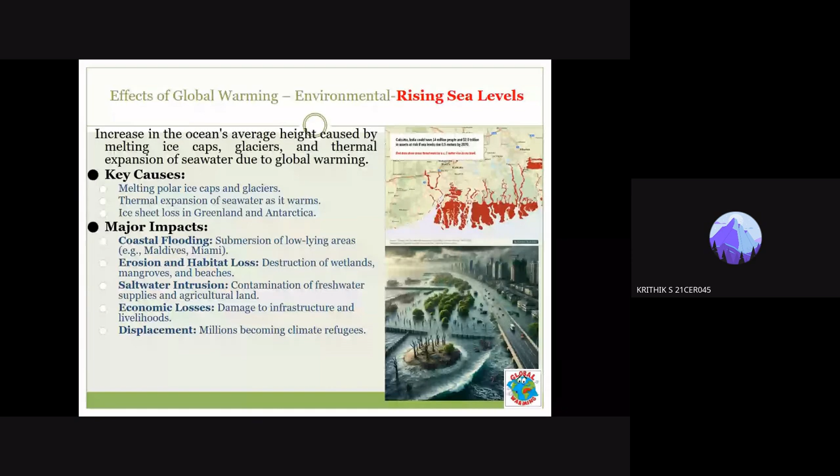So how are we controlling the saltwater intrusion? If we are controlling the global warming, if we are controlling the flooding, or we can control the erosion, side by side we can also control the saltwater intrusions. So there will be also economic losses because we are preparing the scheduling initially using Primavera or many other softwares, MS Office or MS Project or Primavera, to plan and schedule and maintain the activity. And we are also giving the budget abstract estimate, detailed estimate for doing the activity, how much amount we need to spend for constructing the building or producing one element. So if we are not controlling the basic global warming, ultimately the economic losses will be there which we already spent, and finally the displacement.

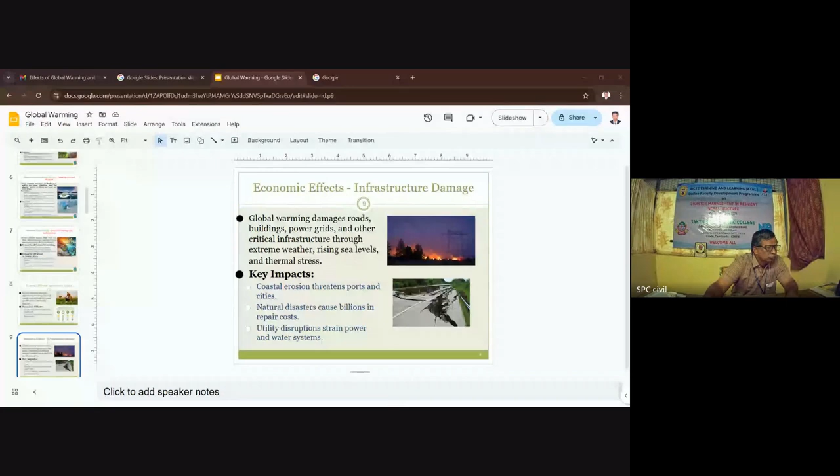So is my screen visible, sir? No, sir. It's not visible, sir? Yes, sir. Not visible, sir. Okay, just a minute. Now it is visible, sir. Is my screen visible, sir? Yes, sir. Now it is visible, sir. What is that heading you are seeing, sir? Which is the slide? Sir, heading key impacts. Key impacts, economical effects, infrastructure damage. Okay. Yes, sir. Okay, sir.

So this is the economical damage which is creating for the infrastructure, because of the vibration or earthquake which is happening to the bridges, or flooding which is happening.

As I already pointed, there is a thermal expansion or thermal behavior, thermal interaction between the environment and the surface we are studying or living on. I will tell you one example: there is fresh concrete we have laid, and it is open to the atmosphere. In some cases, there is a possibility of self-desiccation. Self-desiccation means evaporation of water on its own from the top surface.

So the evaporation happens if the top layer is subjected to more temperature - the water or moisture present in the surface of the concrete gets evaporated because of the excess temperature. And if the water is getting evaporated, that water will not be enough for the hydration. So there will be a formation of shrinkage, leading to cracks and disruptions in the structural element due to cracking and debonding. This is mainly the infrastructure damage exclusively created due to global warming.

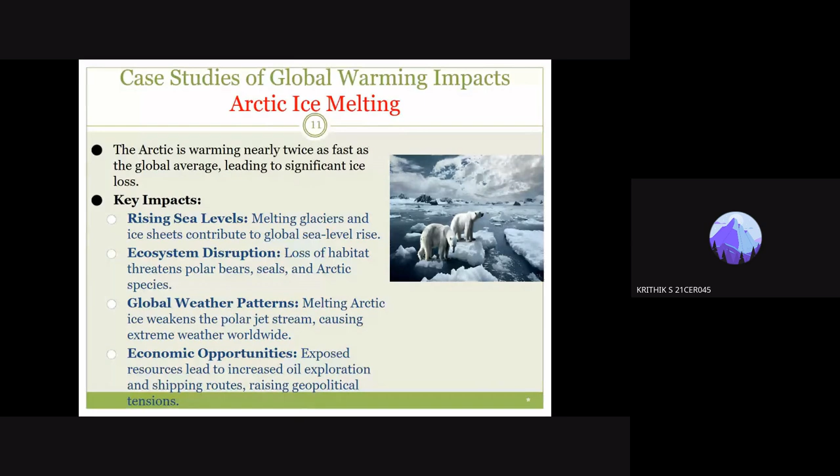The Arctic ice is melting, warming nearly twice as fast as the global average. So while there's a global average scenario for every place, in the Arctic the warming happens at twice the global average, leading to major ice losses. The key impacts of this include increasing sea levels, ecosystem disruption, changes in global weather patterns, and economic opportunities.

Coral reef destruction is another issue, with declining coral reefs mainly due to the impact of global warming, increasing ocean temperature, and acidification, which creates widespread losses. The key impacts here are coral bleaching, biodiversity losses, and economic consequences.

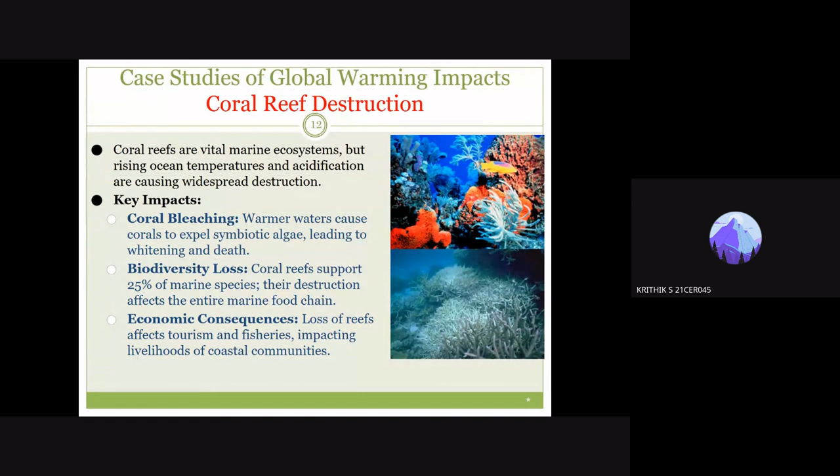A case study observed in European conditions shows that heat waves are becoming much more rapid and frequent, affecting human health, which in turn affects infrastructure like buildings and bridges, and economic conditions, which get disrupted.

The key impacts include health risks like heat stroke and dehydration. Dehydration is being faced nowadays in India too - even though we consume a lot of water, the day-to-day temperature differences create a dehydration effect. Wildfires, as pointed out earlier, destroy homes and forests. Economic losses reduce worker productivity, and there's increased energy demand for cooling, with many places using air conditioners to get relief from the heat.

There was a case study showing how many people died and how many casualties occurred - a very pathetic scenario. We may call this a natural disaster, but truly speaking, it is not natural; these disasters are happening due to man-made causes.

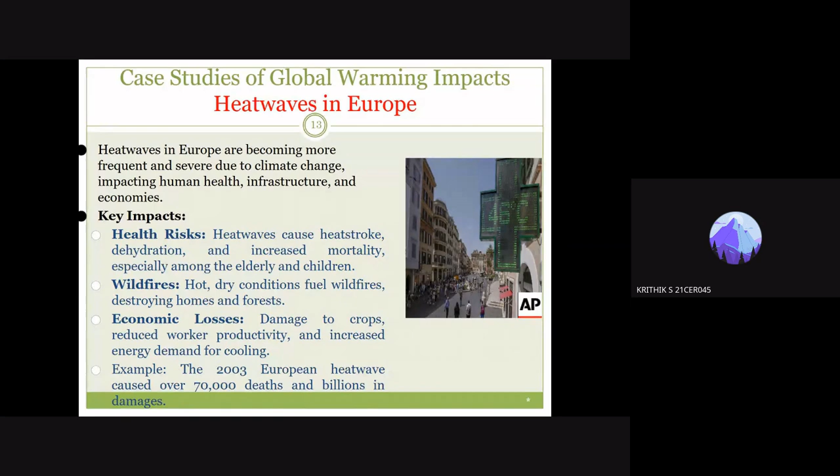This is water scarcity in Africa. NASA had pointed out earlier, in 2017 or 2019, that by 2025 India will face water scarcity. We are already facing this nowadays, and within 5 to 10 years we will face similar conditions as in Europe and Africa, because of various changes in temperature.

You can see in the photo how people are standing to get water, and how there is no proper agricultural area - almost all the places are dried, creating the impacts of drought. In South Africa, the situation is very pathetic in getting food at all times, causing food insecurity and health challenges. In Europe and Africa, people are more affected in terms of age and weight because proper food is not available, and finally people are migrating from one place to another.

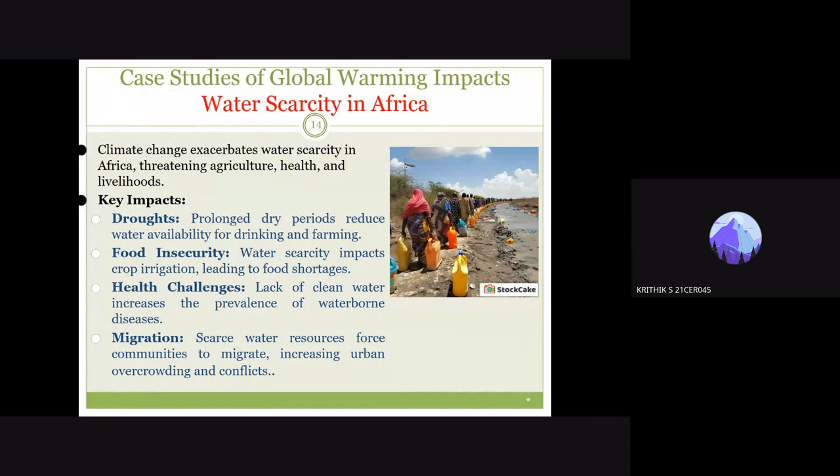Greenhouse gas emission reduction is critical to mitigating global warming and limiting temperature rise to 1.5 degrees Celsius above pre-industrial levels.

So if you want to submit a research proposal to the government of India, like DST or any other agency, people are much focusing on reduction of greenhouse gases, exclusively the carbon dioxide emission. So many places in startup mania, as well as the many SDG goals, there are 17 SDG goals, and one of them is making the infrastructure very green city.

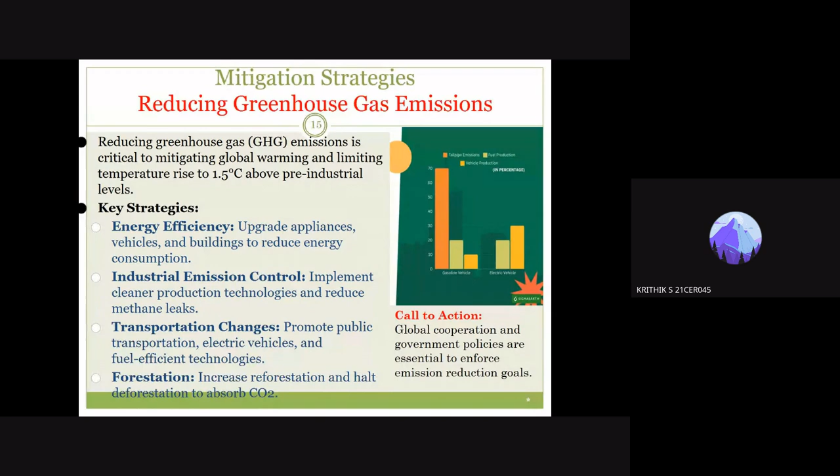And afforestation - we can plant more trees to absorb the carbon dioxide. On the NHs and all, intermediately they have planted more trees in order to absorb the CO2 from the vehicles. So there should be a proper enforcement needed. Government, both state and central, is frequently insisting to control the emission - you should not emit much beyond that. So enforcement should be there, it should come into the agenda.

So transition to renewable energy - renewable energy means generating the energy inside itself, like solar power. Nowadays we are using solar panels in the roofing, consuming energy, converting into alternate sources. We are using the same for burning the lights and for other activities also. So somewhat we should not use artificial energy.

Take for example, piezoelectric transducer. Nowadays in foreign countries, they are embedding it in the pavement itself, where the piezoelectric transducer will convert the mechanical energy into electrical energy. In the pathways, in villas or apartments on the ground floor, where there is more production of energy, they are storing it and using it for burning lamps or some other things.

So in the national and state policies and many other things, government has come up with many advantages, asking the public to use renewable energy adoptions rather than artificial energies. One other example is the generation of electricity from the dam, which we are frequently using.

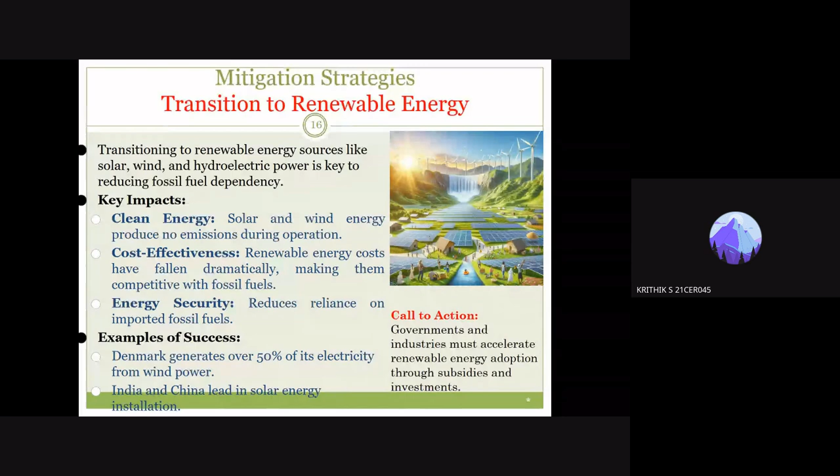In addition, we are also concentrating much more on using alternative materials to cement, like geopolymer concrete. We are using a much quantity of fly ash, and other than fly ash, we are also using sugarcane bagasse ash, since in our locality there are so many sugarcane industries. This is very, very important - please note it down.

Just a minute, sir. Yes, sir. Yes, sir.

I request the professors, irrespective of any department, to note that carbon emission is happening directly—they are dumping into the land. In addition, as an alternative, you can search for the capture methods.

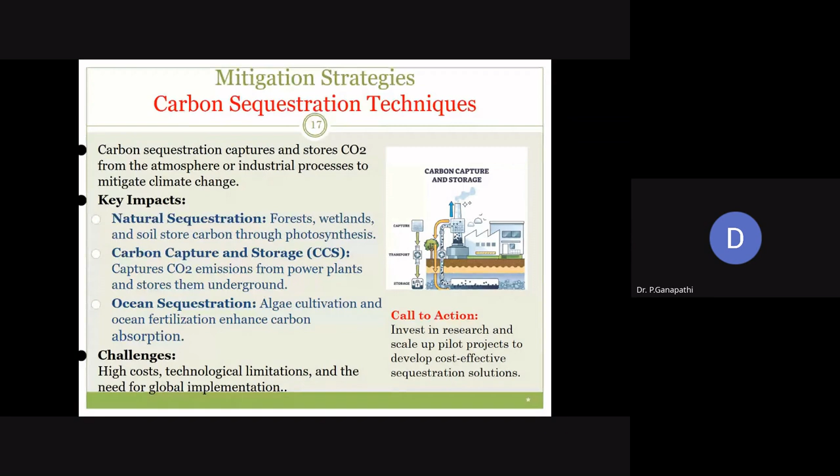Am I audible, sir? Yes, sir, okay, yes.

You can go for the capturing technique—how the transportation will work, how we can have the captured CO2 and how you can store it. Nowadays there is a lot of research available; CO2 is being passed into fresh concrete, and they are studying the mechanism. So we can go for natural sequestration, or carbon capture and storage technique, called CCS, and ocean sequestration.

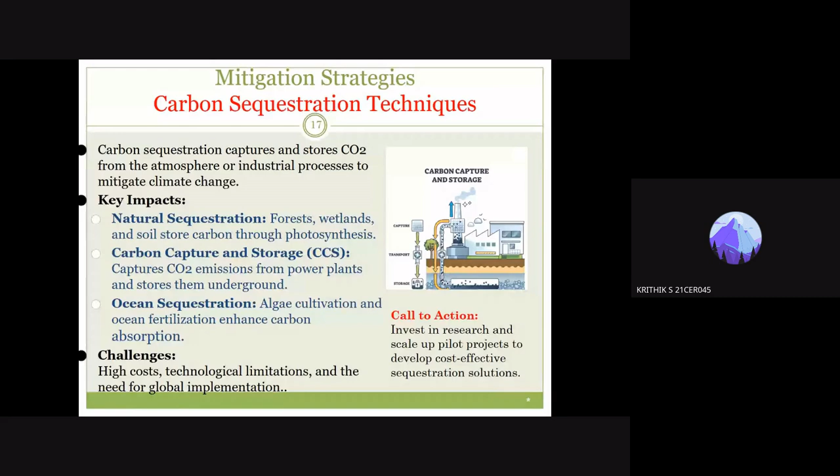This is very important for getting proposals in carbon sequestration techniques. We should shift to low carbon economies by using battery vehicles, like trams. In the US and other places, electrical trams run all over. There is also a new technology nowadays called Hyperloop technology, which you can look up online.

In addition, Hyperloop technology is a very advanced technology where you can migrate from one place to another in the shortest span of time. Minimum speed is around 800 km/h, like flight speed. It's like a capsule where a bullet train runs inside; you can enter the bullet train and shift from one place to another at a very faster rate—minimum 800 km/h.

Nowadays, IIT Madras and America have tied up and are designing Hyperloop technology, in addition to other countries. There are also flying taxis available in Arabia and Gulf countries. So by reducing ground-based transport modes, you can help reduce global warming. The international cooperation treaty, the Paris Agreement, has been signed in order to strengthen commitments and enhance global collaborations.

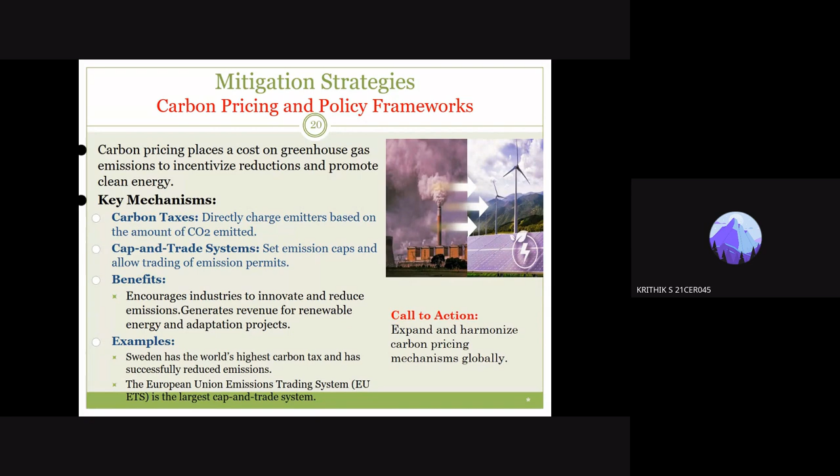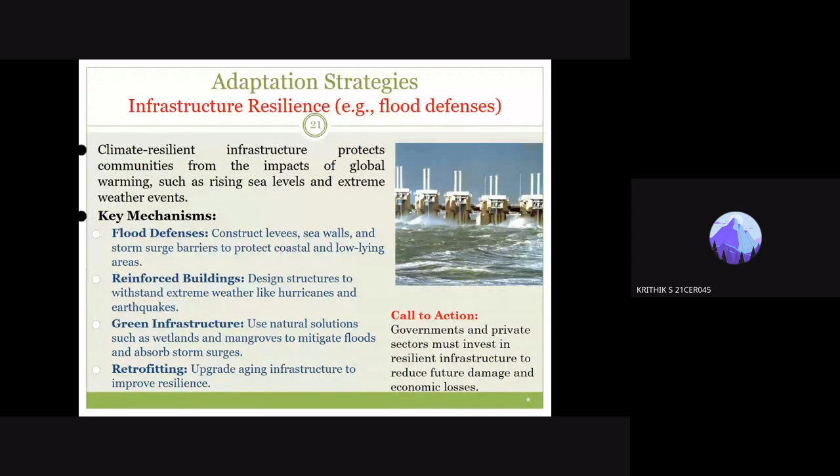So if you are designing geopolymer concrete, our main focus should be on environmental conditions. The molarity should not be fixed but should change with respect to the environmental condition. The key mechanisms to focus on include reinforcement—whether we are using reinforced buildings, green infrastructure, or repair and rehabilitation, etc.

There is a correlation between climate-smart agriculture. Earlier, there were ponds where we stored water for agriculture. After that, we started using drip irrigation. Nowadays, in the modern scenario, we use sensors to observe the humidity level in the soil, and based on that, water spraying happens.

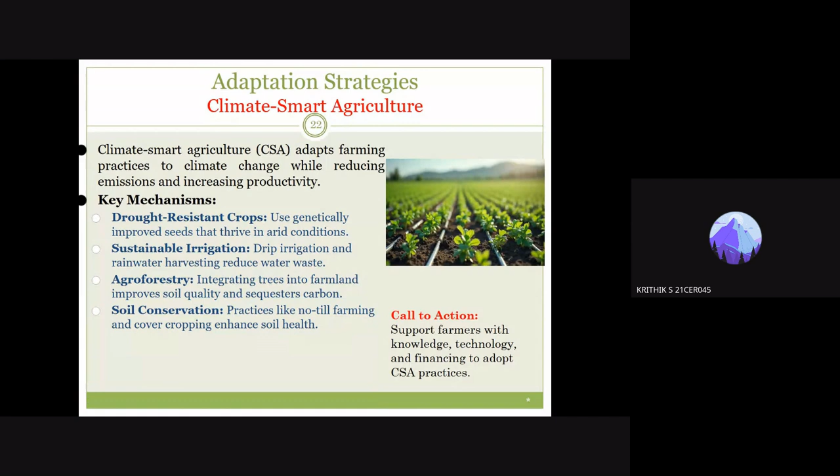In the current scenario, drones are used to spray water over agricultural land, continuously spraying across the area to improve agricultural fertility, in order to achieve sustainable irrigation and soil conservation, etc.

So early warning systems, which I have told you in the previous session, AI tools, early warning systems are giving indication to the agricultural people based on the weather. This will save lives and reduce economic costs mainly from adverse environmental conditions, using community alerts via SMS, radio, or other tools for giving indications, preparedness plans, and weather monitoring.

So these are very important key mechanisms for disaster preparedness. Nowadays people are using IoT. We are working on a project with the computer science department and IT, on how to give alerts to the agricultural field using an IoT based method, such that we get prior information saying your agricultural land is getting dry, there is a need of water for increasing humidity. So in order to improve response and recovery, there is a need for early warning systems.

Community based NGOs should participate, and community outreach should be there. Governments are giving more policies to generate NGOs and international bodies by giving funding, to participate in appropriate knowledge sharing activities. Urban people should come to the rural areas. They need to teach the rural people what crises are happening and how we can improve fertility in order to avoid global warming. Proper education and training should be there.

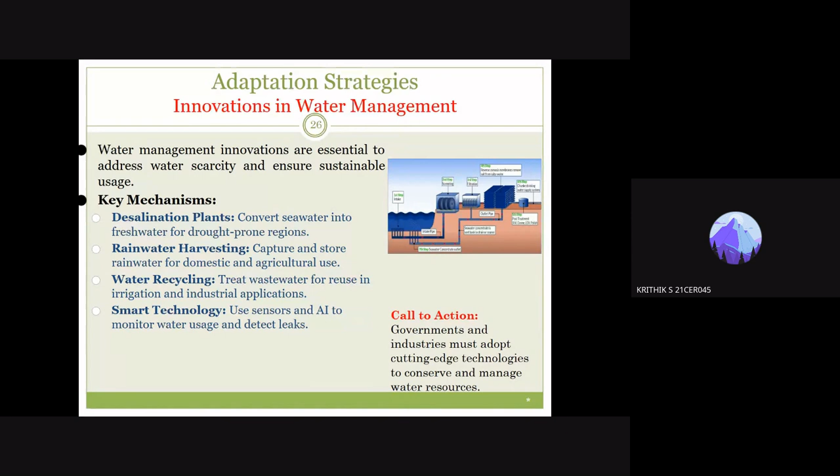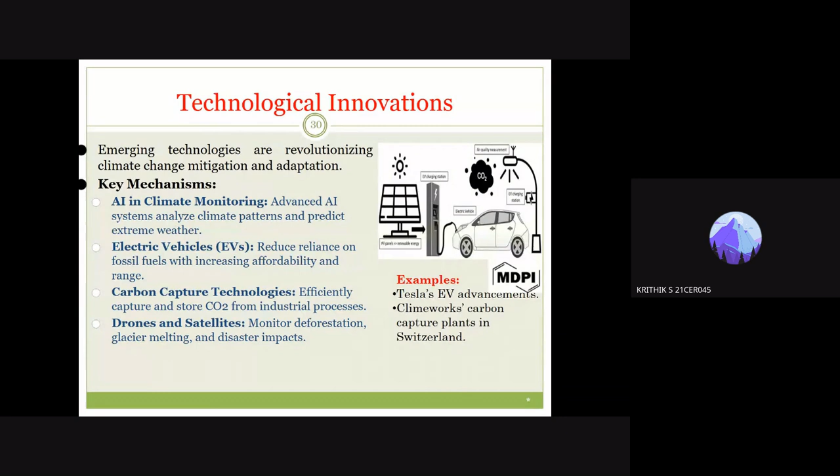So, call to action: World Environment Day is being planned everywhere, and also in college we are organizing many activities, assigning tasks to students on how we can protect ecosystems by conducting more campaigns and initiatives for the public. Ultimately, we need to know about the 3 R's: reduce waste, reuse materials, and recycle. In China, Taiwan and elsewhere, they are doing much more activity in recycling technology.

So finally, I am ending with this quote: be the change you wish to see in the world. Thank you so much.

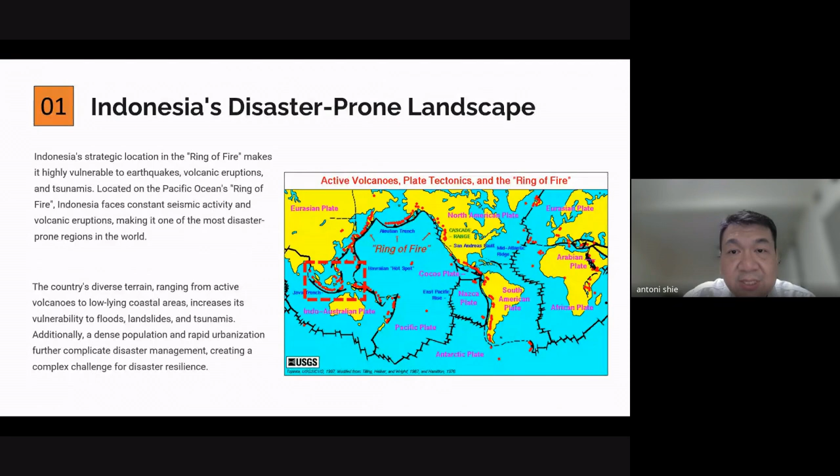In this condition, Indonesia has many earthquakes each year. We can see big and small earthquakes mainly occurring in the southern area of Indonesia. This is a country made up of islands—there are 5 big islands: Sumatra, Java, Kalimantan, Sulawesi, and Papua. These are our main islands.

There is movement of the tectonic plates as shown here. We get movement of about 5 to 6 centimeters in this area, 7 centimeters. This movement causes collision of the tectonic plates, resulting in significant earthquakes in this area, and also in the Sulawesi area.

Most of Indonesia is disaster prone, and we can see here the least occurrence of disaster is in Kalimantan. This is in the center, which is why Singapore, Malaysia, and the Kalimantan part of Indonesia have quite low risk of earthquake occurrence.

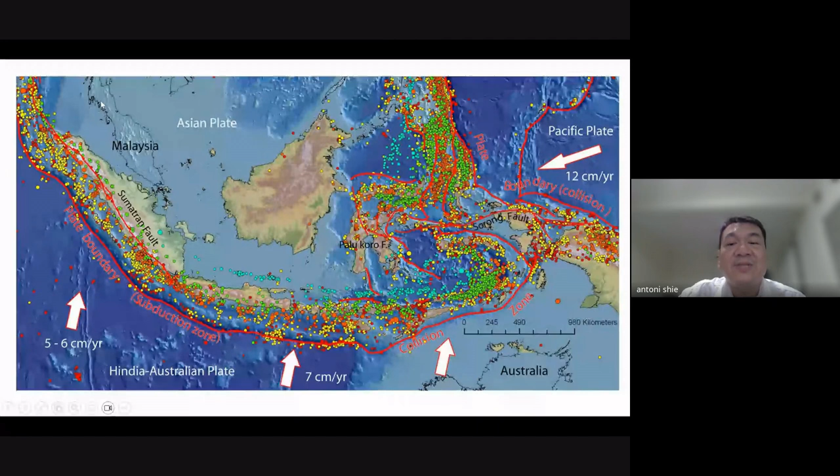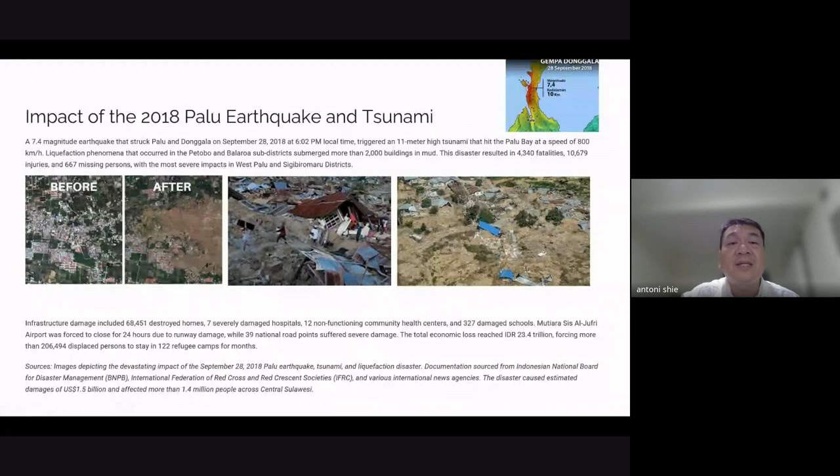We can see the data shows many earthquakes have already happened in Indonesia. When we survey the damaged areas, we see there is a significant lack of controls in the building codes and construction. This is mainly the picture I got in Yogyakarta, even in the center of Java, the most populated area, where there are many educational institutes. We can see the very lack of design. Here are the details of the building - this building is quite new, about 2007, and got destroyed during the earthquake. We can see here the lack of stirrups. So this was mainly the design, and the details of the building were not on par with the current code. The design code was already implemented, but many buildings were not following the code.

And then we can see here, this is also a damaged building, and even some part of the area, we can see this is like a wall for the building, and it's lacking the structural elements. So there's no column, no stirrup, and no flexural rebar in the column.

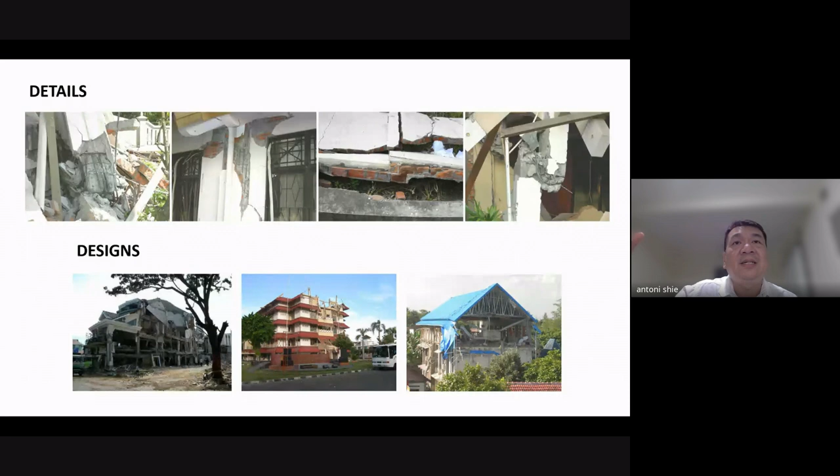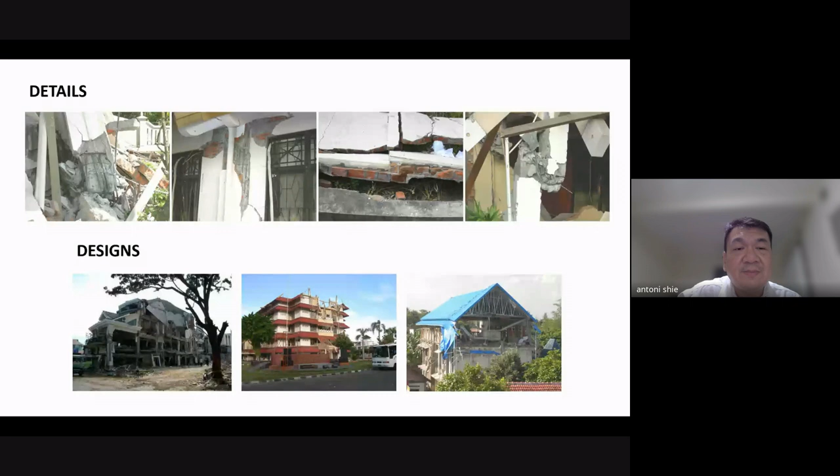And this is another building, a hotel I think. So there's a process of construction in stages. That's also a big concern, because when people are building their home, or building some kind of commercial building, sometimes when the capacity is not enough, they increase the level and add a new section, and the connection of the building is not properly controlled. So what we've shown here, I think this is still common.

So I talked with my colleagues already, and he said that the problem is still the same, even in the 90s, in the 2000s, and even up to now, many problems are due to the connection detailing.

So when there's a building, we can design it to be earthquake resistant. The design is good, but during the construction period, there's a lack of control in the detailing. I think the most significant detail we've shown here is that the stirrup should be bent 135 degrees.

So 135 degrees, so that when the concrete is cast, the stirrup stays inside. But most construction just uses 90 degrees, so when there's a big movement of the column, the stirrup can open easily.

So this is a very common process of construction. Even though many details are already shown, sometimes lack of control and lack of awareness of the details causes the damage.

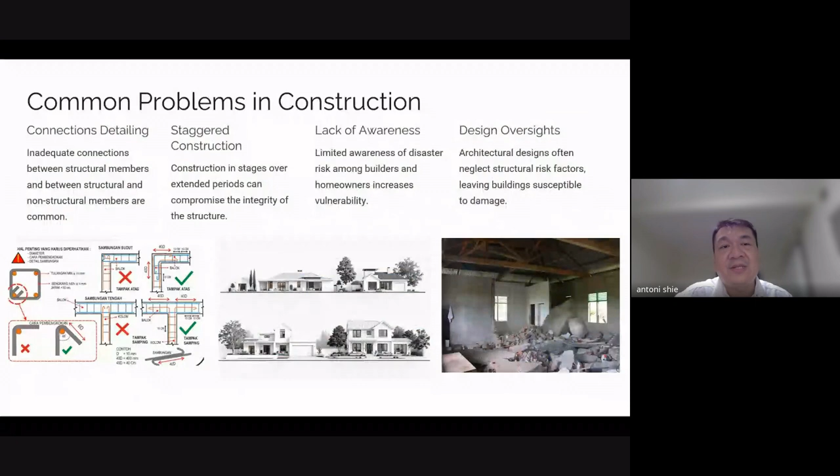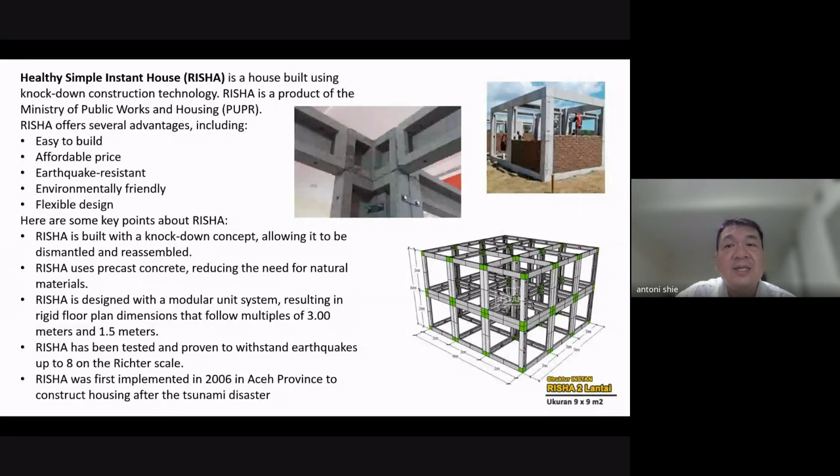However, the application of this kind of building is not much. Mainly it's government subsidized and implemented during disasters. So after Aceh and after Palu, they sent this to the region and used it for housing for the people. Due to the lack of construction guides, many academicians also helped the people to make a guide.

So there are many construction guidance. This one is Teddy Boen, who I think is also famous in Indonesia. He proposed a very simple construction method, even the wall using mesh and then plaster, like a mesh wall. So the design is very good, but of course design and implementation is a bit different, because when we add cost, some people just don't want to spend that cost for increasing the details.

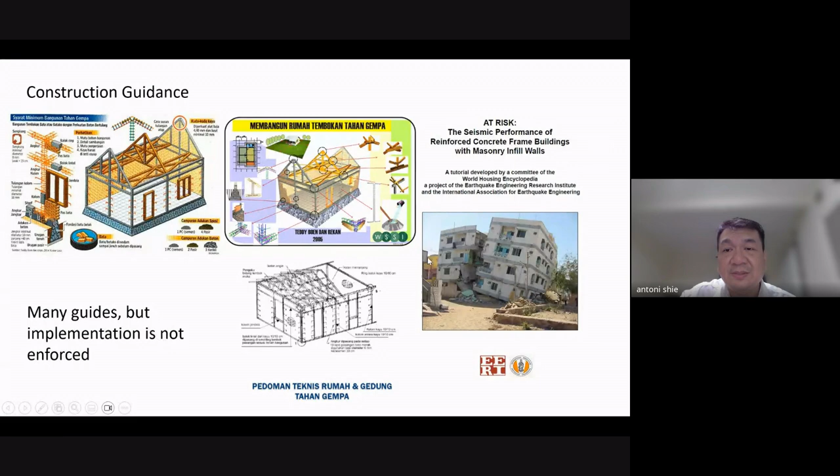So there's many guidance, but the implementation is not enforced. This is still one thing that happens. For the summary of the condition, disaster risk and awareness is a major challenge, because complacency, widespread code violation, and limited public understanding leads to many structural deficiencies. This is also a problem that we are facing, and it's still going on. That is the condition of disaster in Indonesia.

So I want to continue to the next topic. I think this is also very interesting to show that the earthquake is cyclic. People in Aceh and Nias already know that there is an earthquake happening every 20 to 30 years, a significant earthquake will happen. That's why the people are already building housing that can withstand the disaster that happens. So these are examples of traditional housing in Indonesia.

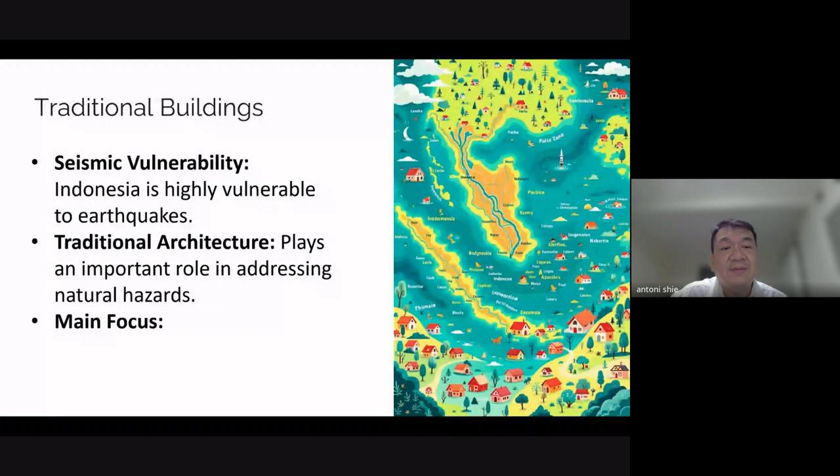In Indonesia there is of course seismic occurrence. People already know this, and the architecture is also adapting to the challenge of the region. We can see that traditional buildings often combine natural materials, bamboo and wood, that are flexible and earthquake resistant. The construction technique is also designed to absorb earthquake energy and reduce impact.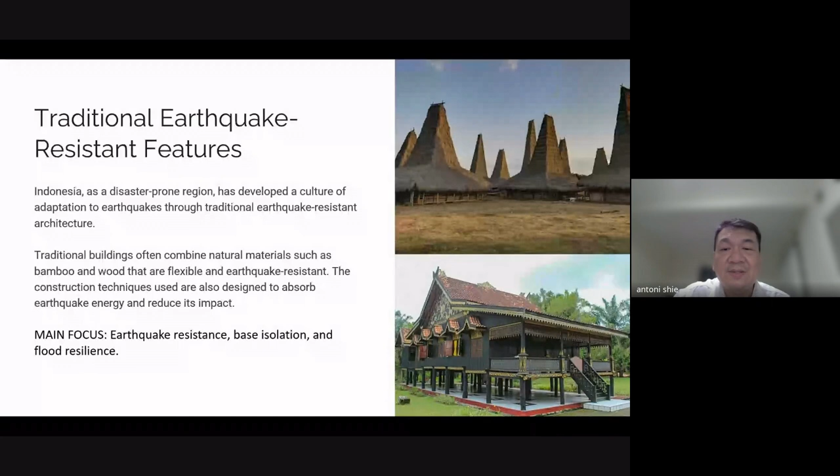So the main focus - currently we already know what is good design for earthquake resistant buildings. But previously they just based it on experience, the experience of the surviving buildings. So when they see a building can survive, their neighbors, when rebuilding their building, of course used the same kind of design.

The earthquake prone region also uses lightweight structure. That's why lightweight material also reduces the damage to the building, because when there's a very big earthquake, the building has less force in its structural members. And also the main part is that we realize or unrealize the building stands on some kind of support, like a base isolation model.

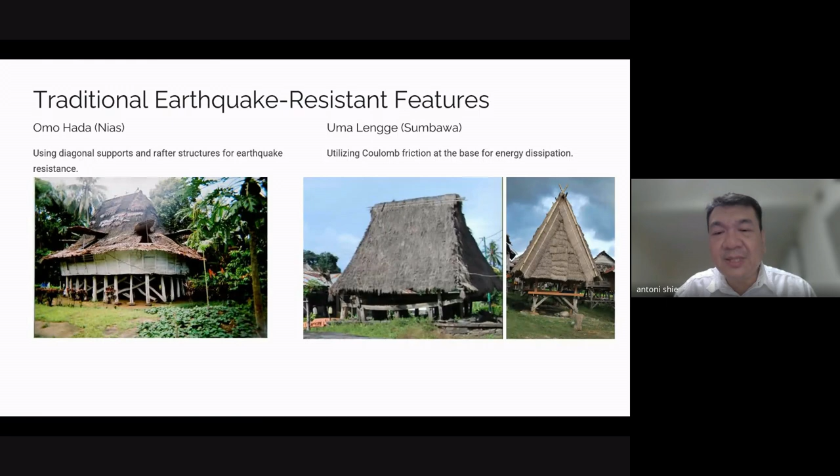So the footing is like this one. They all designed the footing of the house using wood, and it was placed on stone, so the wood will not rot when there's a connection to the ground. But this kind of connection can be considered as Coulomb friction for energy dissipation. This is the condition of the building. For the Omo Hada, there's many diagonals, so the stiffness of the building is quite high.

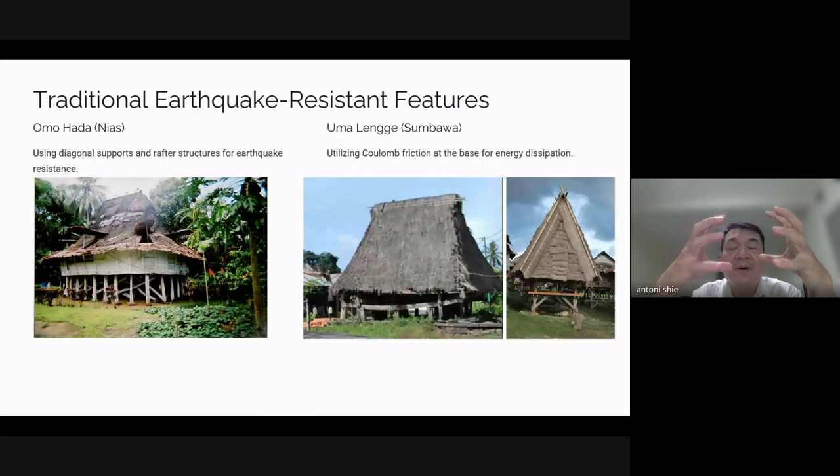We can see here that mainly due to experience, when there's an earthquake, the building will behave like a solid block on a moving platform. I think that is the design, and this is a traditional design, and even modern buildings already understand this kind of design.

And then at the bottom, this is similar to a base isolation model, but for modeling we use Coulomb friction. So we can get technical insight from traditional design.

Modeling traditional structures is quite difficult, so the joints are normally assumed as fixed. However, the real connection of wood is normally using struts, so there's some kind of movement, not really fixed. And the model of the connection friction can also be varied.

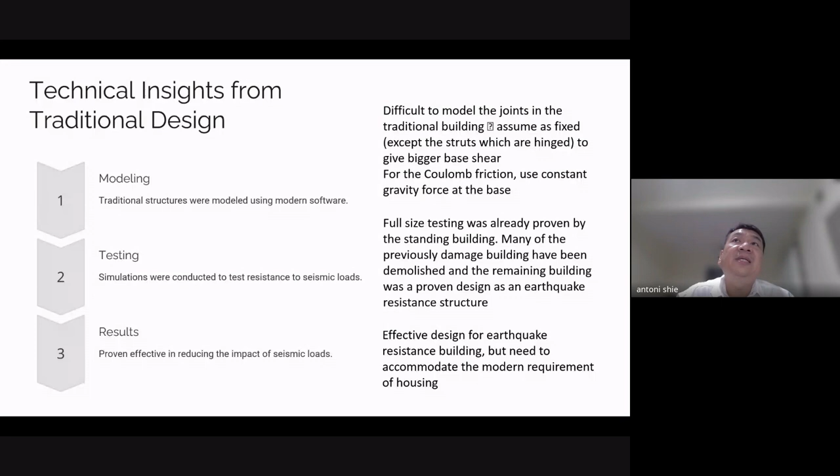So the testing normally cannot be done on our design, but this is a traditional building. They're already tested one by one, so the full scale model already tested, and the design that is surviving is already proven by the standing building. Previously damaged buildings already been demolished and also already been modeled to show that the latest design should be the best one, an effective design, but this design needs to be modeled for the modern building too. So this is the result.

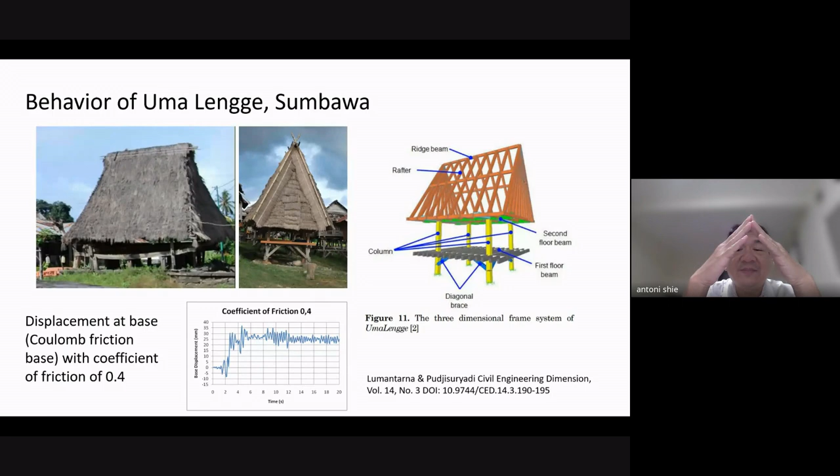So when the building moves, what actually happens is the energy of the earthquake is not transferred or absorbed by the member, but absorbed by the movement of the building instead. This reduces the energy on the structural member itself, just changing it into movement.

The friction coefficient was also varied. When the friction was too low, of course there's no dissipation of energy. But when the friction was too high, it's similar to the building being locked into the ground, and all the energy is absorbed by the structural element. So there's a balance needed.

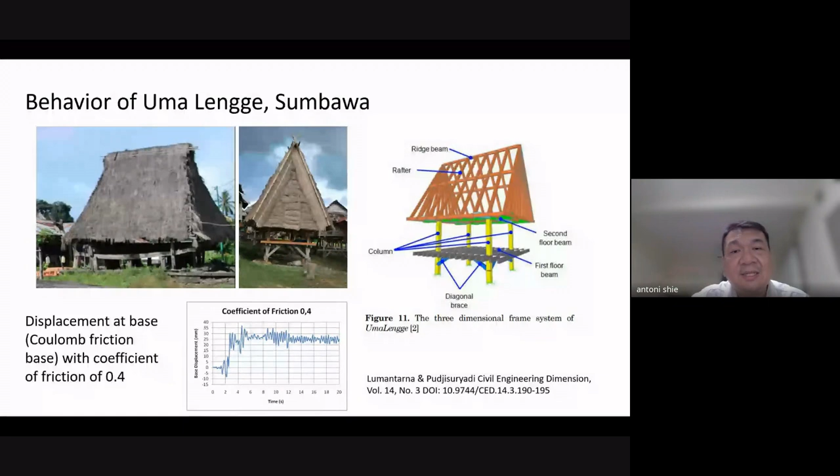We already know modern buildings use base isolation. The base isolation system causes less deformation in the building, and more energy is just changed into movement energy.

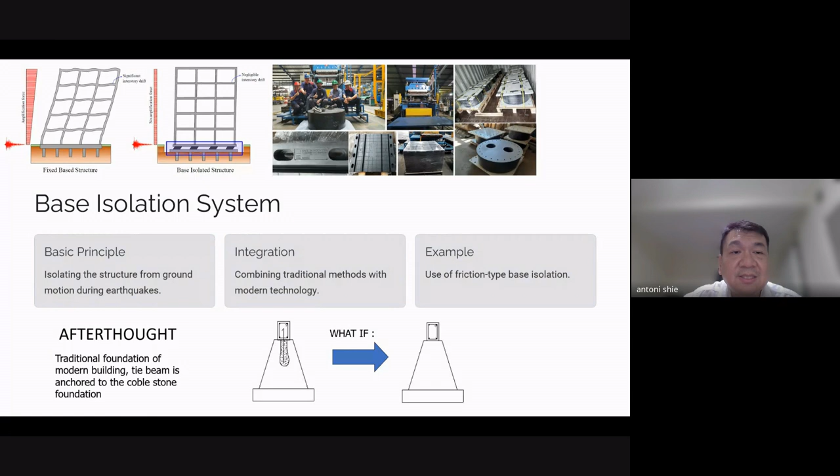There's an afterthought from my colleagues that for current buildings, we still need to think whether we should anchor the tie beam - the structure for the floor - to the foundation, or just put the building without anchoring, making it slightly wider, with a ground layer and everything. So this is a process that still needs to be considered.

Challenges in modern adaptation were also considered, and I think he made a paper after this to model a more common building with Coulomb friction modeling. Of course, when there's movement of the base area, there's a reduction of deformation in the building, and the damage should be reduced. But practical application needs to be considered, like the cultural condition of the people, and technical factors.

When the building is used, of course there's some maintenance issue that needs to be addressed, because when we allow movement of the building in the design, the maintenance should not make the design fail to happen due to lack of maintenance.

That's what I'm saying. Also in Indonesia, mostly the buildings are non-engineered. Like the guidance I showed you, most houses are just common housing with columns, walls, and roof, one or two story levels, so they were not designed to resist earthquakes. The majority of our private housing was built without engineering design.

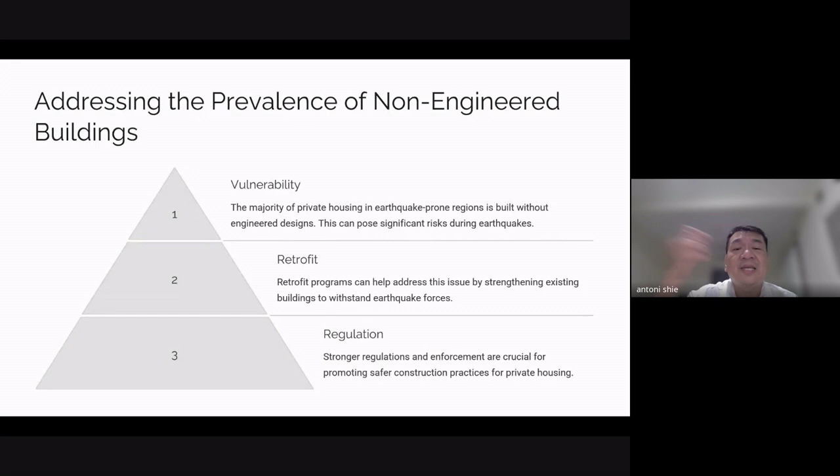So I think that concludes my talk for the third segment.

The fourth topic I want to talk about is low damage design technology for earthquake resistance. This is also a concern, because after we make a building and an earthquake happens, there's damage on the building, and then there are aftershocks. Most fatalities occur after the main earthquake shock, then there's an aftershock, and the building is not safe. When people have activity in the building during the aftershock, it's also very dangerous.

When I was visiting some post-disaster areas, there was a big earthquake in Padang around 2005-2006, and the building was damaged. Then after 3 or 4 months, there was another big earthquake, and the previously surviving building got destroyed during the second earthquake.

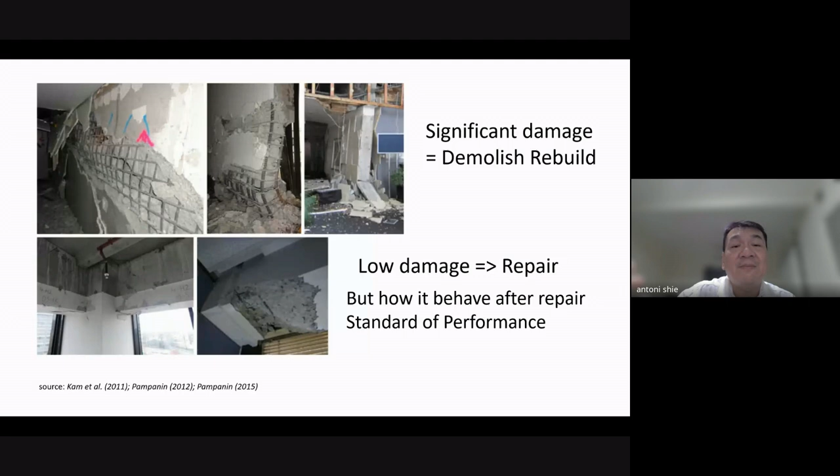For the topic shown here from Professor Pampanin, he shows a building using precast concrete where although no damage was shown, the lack of confidence in that building caused it to be demolished. Even though the design was good and the performance after the earthquake was still good, due to the lack of confidence in the soundness of the building, it also got destroyed - because the building was not designed to be able to be low damage. So I think that is also one consideration.

We already know that when designing a building, when there's a low magnitude earthquake, the building should be fully operational. When there's a higher magnitude earthquake, essential buildings still need to be fully operational. When there's a rare or very big earthquake, life safety should still be the goal.

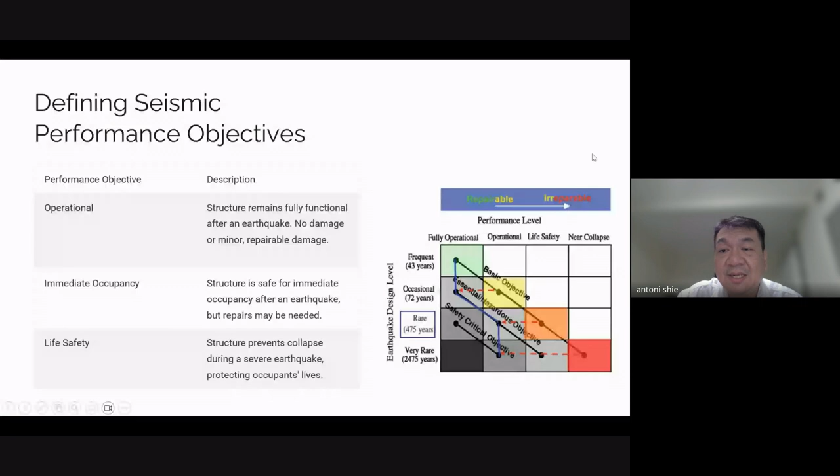Very rare collapse, near collapse should be the goal. So when is the building repairable and when is it irreparable, that is the consideration.

This shows the need for low damage design. Traditional seismic design focuses on preventing structural collapse during an earthquake, because the designer's consideration is just that we design it so that when a big earthquake happens, it will not collapse, and then after that we need to rebuild. So when designing for that kind of building, when disaster happens, the cost for rebuilding is very high.

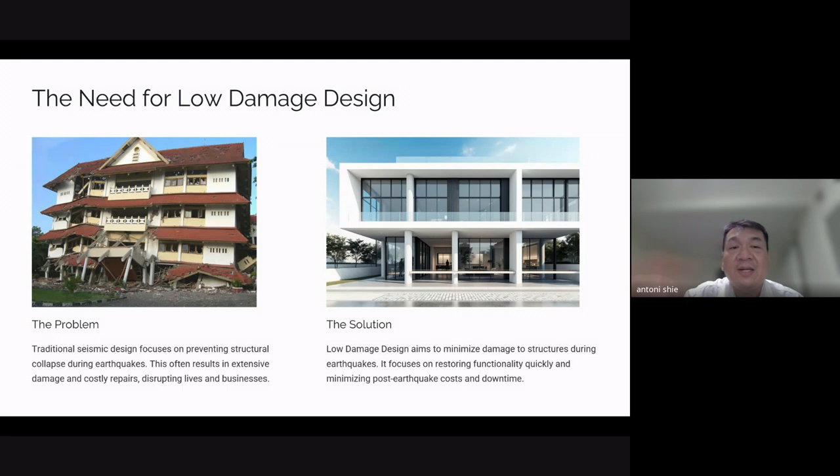So the new paradigm should aim on low damage design to minimize damage to the structure during an earthquake. I think this idea is simple: when you have many components connected by pre-stressed material, after movement it can still continue going back to the original state.

The damage control technology previously developed includes three key strategies: base isolation, dissipative braces, and others. Base isolation is separating the structure from the ground. The technology now is very advanced, we just use rubber bearings. Dissipative braces: when there's earthquake movement, there are many braces in the building that absorb the movement and reduce the stress on the structural element.

Post-tension rocking mechanism is where part of the structural element is connected using a post-tension cable, and after the earthquake it will move back to its original position, just like a toy.

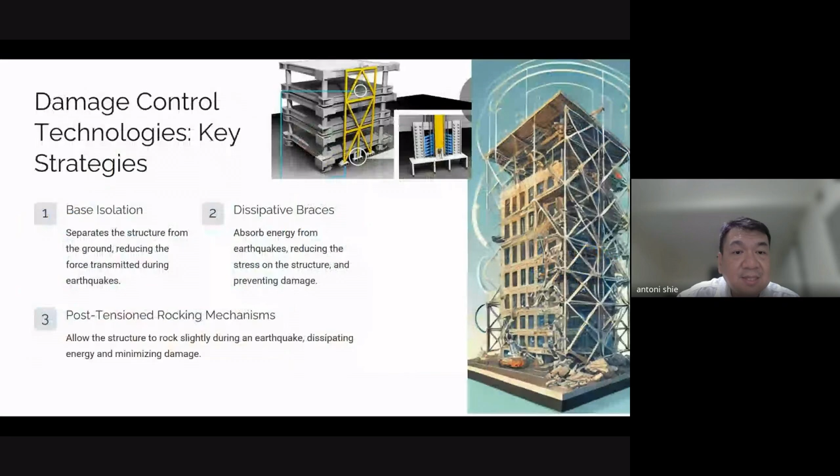This is similar to the traditional building I showed previously, but with modern design. This process is very expensive though. There's also a building for a school, built with earthquake resistance using base isolation. The design is still common and can already be applied, but the cost is still very high.

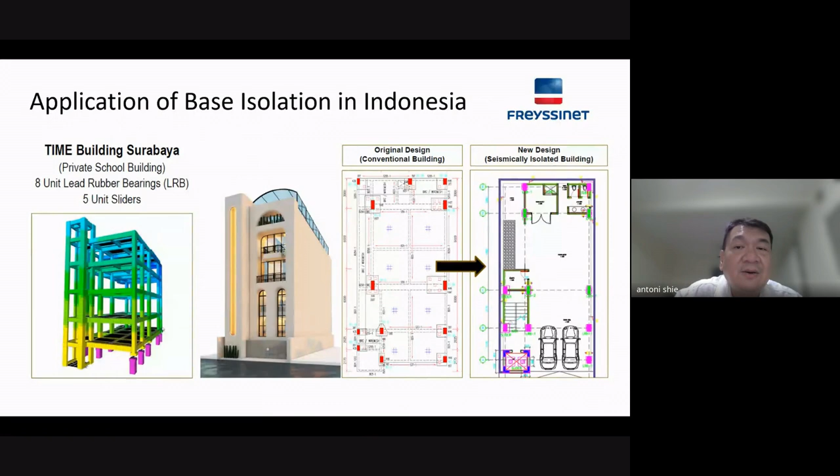Comparatively, previously we also considered that when you have a low seismic force on the building, the member should be smaller. This is also a consideration when there's base isolation - normally you'd have a smaller member size due to the lower force, but the cost still needs to be considered.

This is the model for self-centering, using unbonded post-tension tendon bars in the center of the structural member. If there's a picture here, similar to this, the structure can have a rocking movement, but there is no energy dissipation - only after movement it will return to the center.

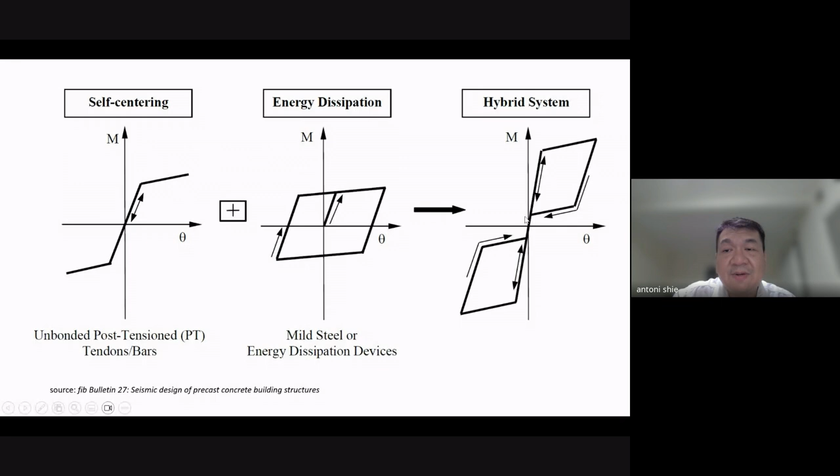In a normal structure, we use mild steel. When there's movement, there's damage on the mild steel - it yields and then returns. This is of course the energy dissipation mode. So what the system wants is to have both self-centering and energy dissipation process. The low damage design concept is about minimizing structural impact - number one, we need to reduce the damage.

So the design normally uses precast members. For the connection, we just need to ensure that the connection will be damaged in a controlled way, while the structural member does not take big damage. Even if damaged, we can just replace that part of the members. We need to increase resilience and recover quickly—I think that is the keyword. After the earthquake we can recover, and the occupants are protected during the earthquake.

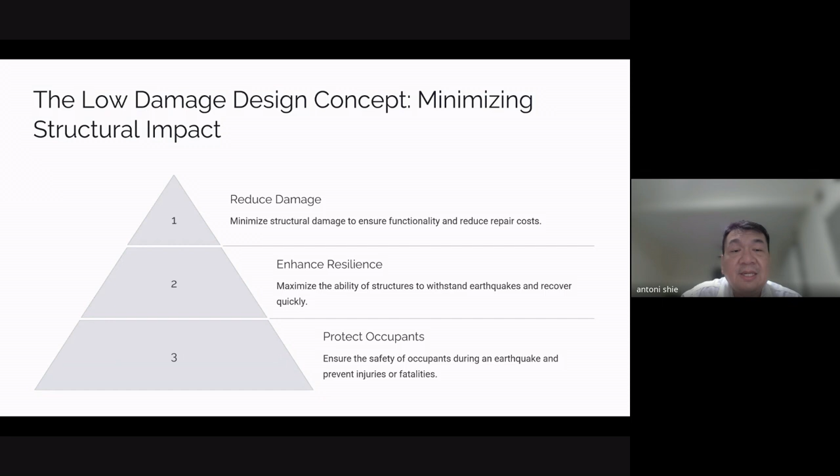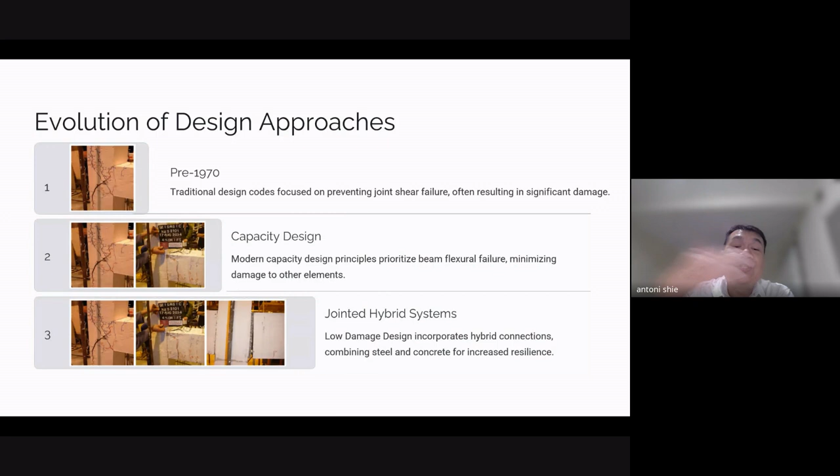After that came capacity design, which prioritizes that failure should occur in the flexural mode, where the beam can deform quite significantly so other parts are not damaged. After this, low damage design needed to be implemented, allowing this kind of movement of the member during a big earthquake so the damage is only localized. We can then inspect the connection part after the earthquake and replace it when damaged, ensuring the safety of the building.

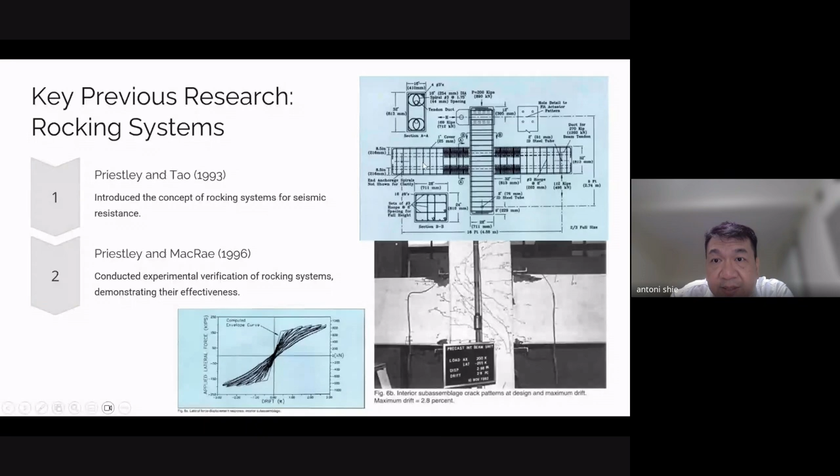Previous research was conducted, I think by Professor Priestley in 1993 already—the model is the same. They used a center pin or just a connection. So yeah, the damage avoidance design has also improved.

Changing to minimal damage, normally there's a prestressed strand in the concrete, ensuring that after the movement it will return to the center point. This is the model that's normally used.

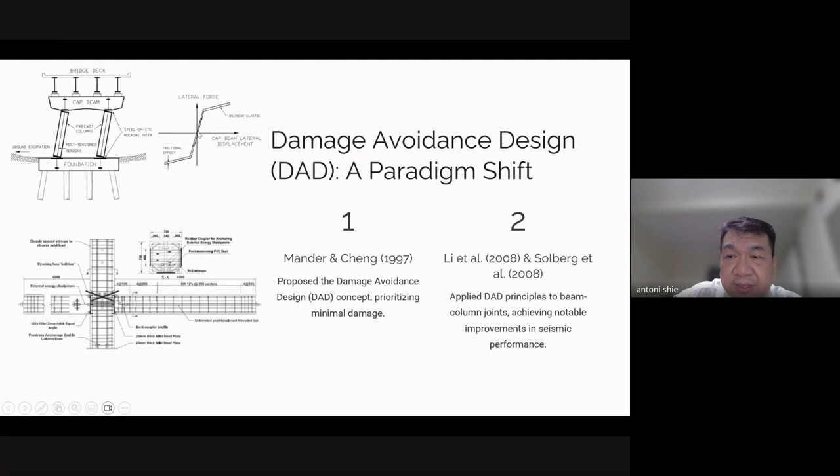The design paradigm is that after an earthquake with a specific design level, the frame structure will remain operational, will not collapse, and is repairable following a very rare earthquake. Then there's energy absorption—we can use mild steel bars or other dissipators to be replaced after an earthquake.

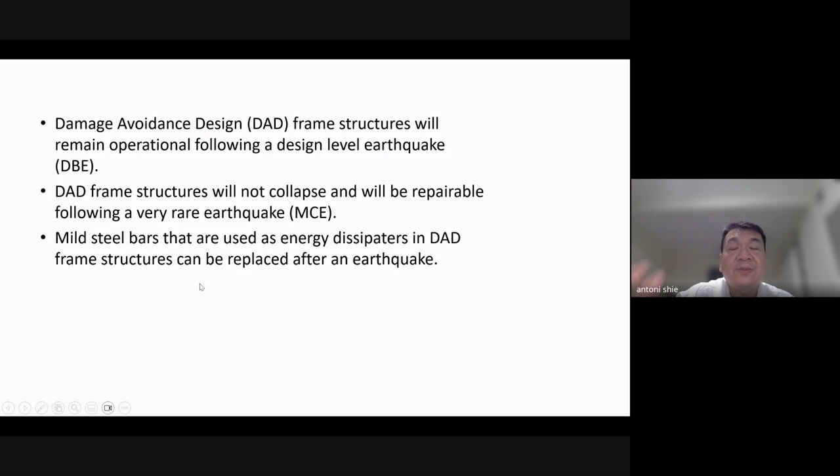So yeah, this is the latest research, but we are still developing it to implement damage control design. My colleague is researching the hybrid connection and evaluating its performance.

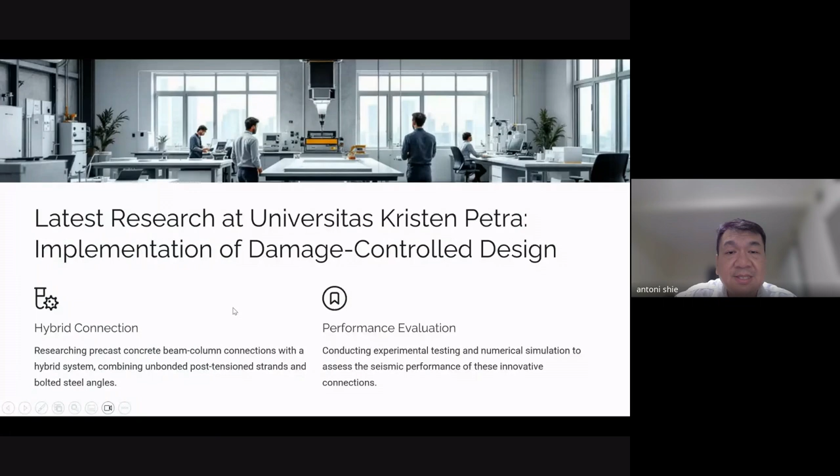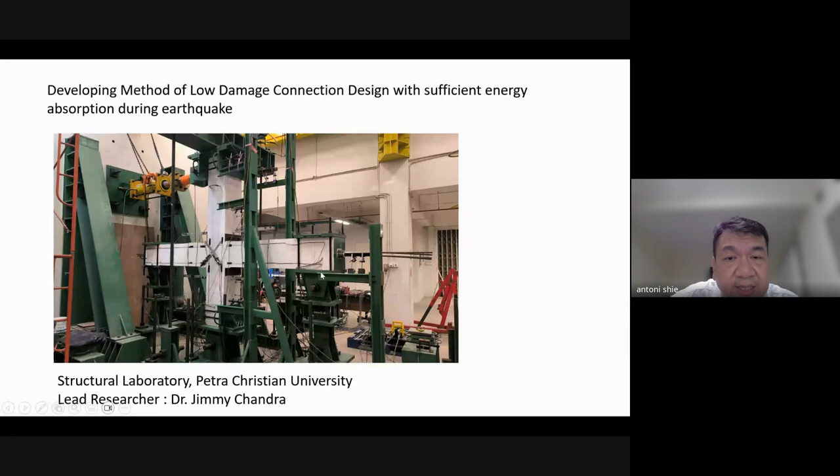In our lab we have this kind of structure—this is a reaction wall, about 50 tons, and this is the column and beam connection we are designing. We can see there's a strand to ensure the self-centering process, and we investigated using a precast member. The connection uses both steel angle and bolt, ensuring that when there's an earthquake only the connection will be damaged.

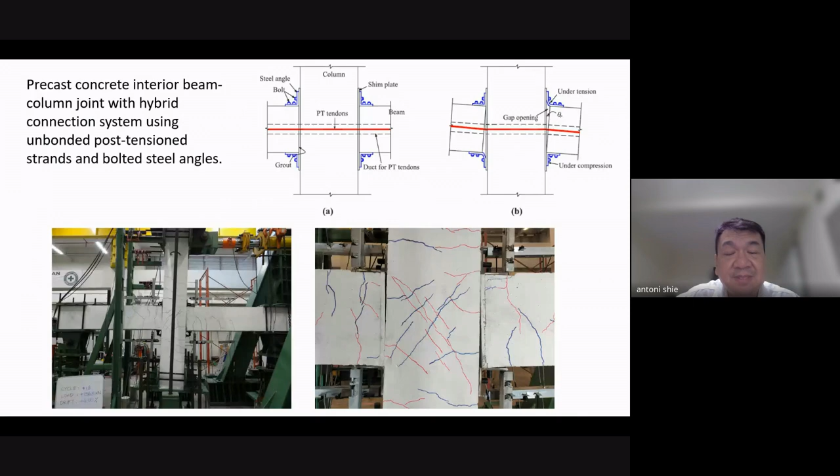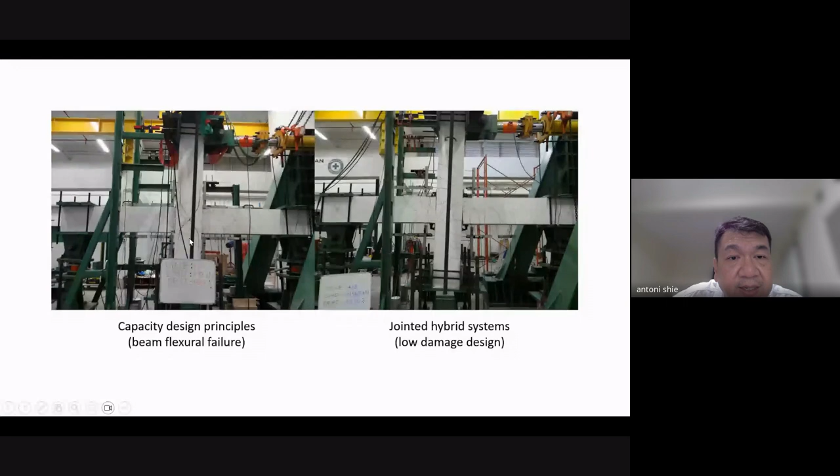So under tension it will deform, and the opposite side will deform. The performance is being evaluated, and after the damage we can see what the capacity is, then replace the damaged area and check again what the performance is afterward. The research is still ongoing, but this is some of the specimen being tested.

So I will go to the concluding remarks and future direction. We already know the importance of resilient infrastructure is mainly to protect life. Resilient infrastructure is critical to protecting life during disaster. Designing buildings and transportation systems all need to be considered to minimize casualties and injuries.

The next step is to minimize the economic impact after disaster. Seeing that the Indonesian region is very disaster prone, what we build needs to consider the economic impact after an earthquake or other disaster, since economic activity will be disrupted. This is also an important point in making resilient infrastructure.

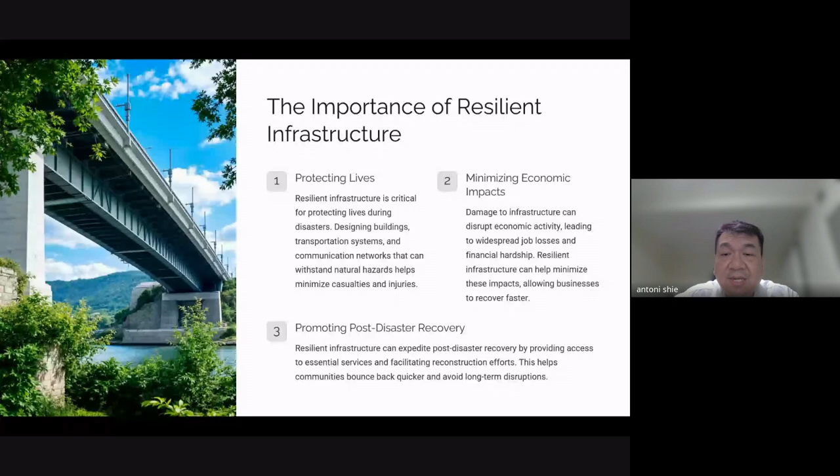Also, post-disaster recovery—the low damage model of the building that we showed would essentially expedite the disaster recovery. And yeah, this is the key lesson learned from disaster.

I think early warning systems—after the tsunami there was big funding to make early warning systems. But the problem is the maintenance of the sensors, because sensors degrade over time, and the disaster may happen only maybe once in 20 years, so sometimes the sensor becomes outdated and damaged. This is also still a big problem in Indonesia.

Integrated disaster management—there is effort from the government, and community engagement is still developing. We are still in the process of considering this disaster.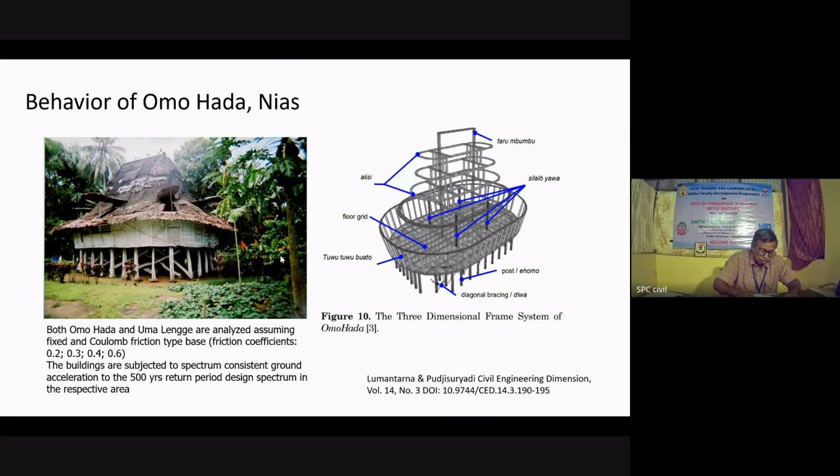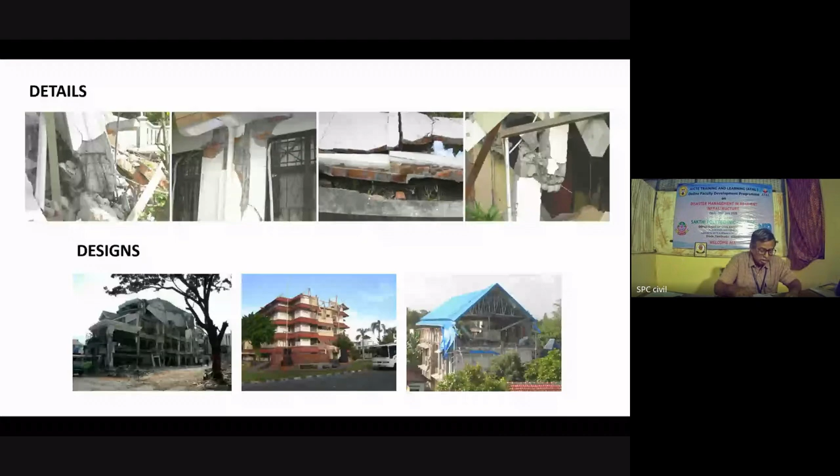Thank you very much for the wonderful session on recovery and reconstruction of a disaster. Professor covered Indonesia's disaster-prone zones, landslides, and the distribution of population. He covered the details about Sumatra Island. He dealt with case studies and photographs of the 2004 earthquake and tsunami having a magnitude of 9.3 Richter, which also occurred at the same time in India. He discussed the 2006 earthquake and the impact of the 2018 earthquake also, and mentioned common problems in construction. He told about the crisis of disaster risk unawareness, and narrated traditional wisdom and integrity resilience. He advised low damage design technology for earthquake resistance, and also covered base isolation techniques.